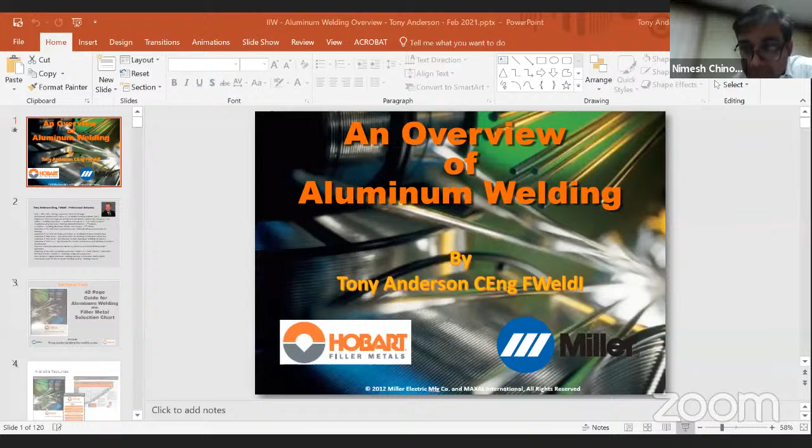Okay, thanks for all that, guys. This talk, we have a limited amount of time, so this is certainly an overview. We don't have time to get into real depth in most of this information we're going to be looking at right now, but my hope is that you will see the areas I consider most important related to the joining of aluminum and aluminum alloys, and give you an idea of areas within each that we could probably expand upon. I'll also include information on other materials where you can gain more on all these topics. So anyway, let's get into it.

Remember, this is an overview, and it's quite a lengthy presentation, so I'm going to be moving through it at a reasonable pace. As Chris said, that's me. I'm involved with a lot of AWS work, I've been on the AWS board as a director at large for the last 10 years actually, but I work with AWS a lot, and I work with ASME a little.

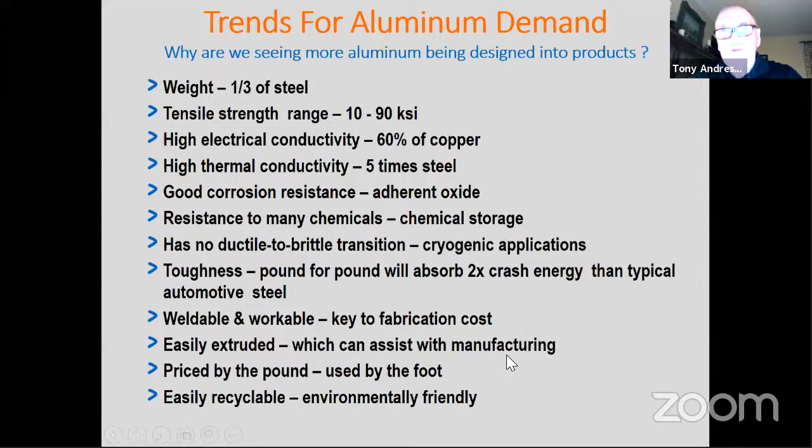Now, I had a chart that went back to 1940, and this curve wandered all the way down to nearly zero in 1940 - there was very little aluminum being used. Something happened in the early 1940s that made aluminum much more attractive for welding fabrication. Some of you probably know that was the introduction of the heliarc welding process, or TIG, gas tungsten arc welding as we know it now, developed in the early 1940s.

Shortly after that, of course, we got MIG, the gas metal arc welding process. But the inert welding processes were the big breakthrough in welding aluminum. Up until then, it was very difficult - you needed fluxes that were very corrosive, typically it was welded with oxyacetylene, and you could only weld certain alloys. It was very, very difficult. So yeah, absolutely, the introduction of inert gas welding processes in the 1940s was a massive breakthrough, and from then on we've just been seeing more and more aluminum.

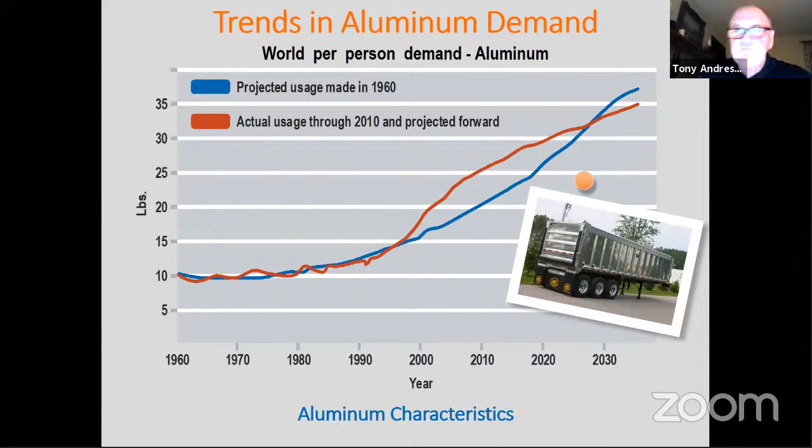I'll just go through a few pictures here that I chose of different applications, and just look at them quickly.

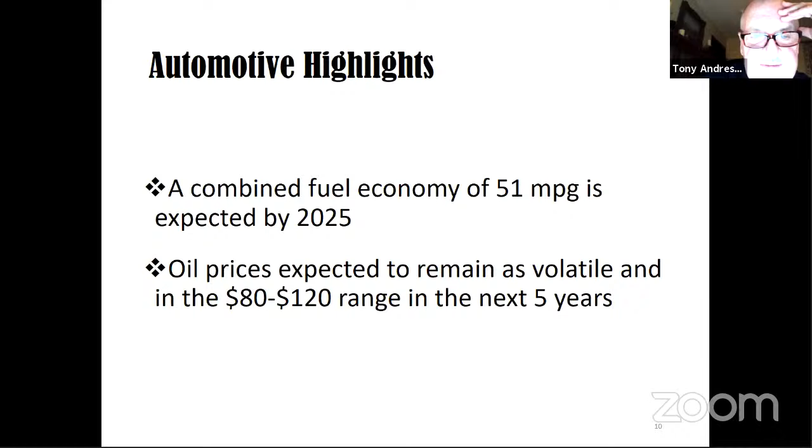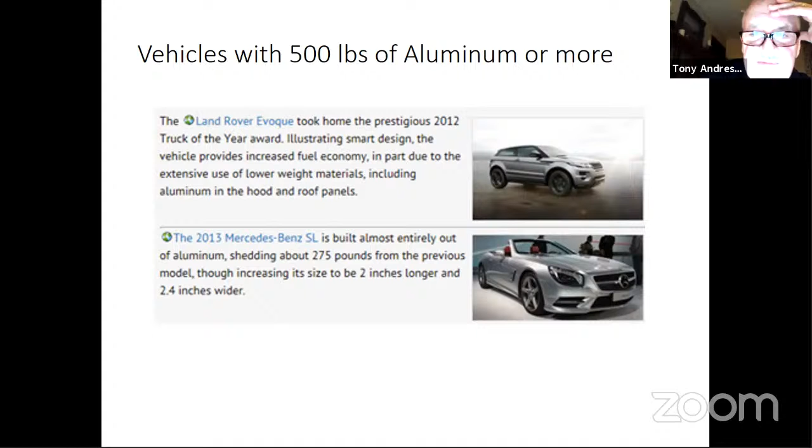Some of the vehicles you've all seen - the Land Rover, the Mercedes - these guys have been using aluminum for a long time. BMW and Audi were pioneers in space frame development when they started using aluminum in vehicles.

The big one over here a few years back was the Ford F-150, which is probably the best-selling vehicle in the world, but certainly in the States. It became an aluminum-intensive body, and it was a big deal at the time - the first high-volume aluminum-bodied vehicle to go into production in the world.

About 850,000 trucks per year and 350,000 tons of aluminum sheet per annum. So that was a big deal.

I'll tell you a quick story here. I have a good friend I've known for many years, a lady called Joanne, who works for Ford and heads up one of the research groups, PhD in laser welding. That was a specialty, I've worked with her on and off for years. She and her husband, who also works in the automotive industry developing aluminum fasteners, were working on the F-150 as a top secret project. They were sworn to secrecy, didn't want competitors to know they were putting all this aluminum into the vehicle. They came to find out that their daughter, who was very young at the time, told a teacher and her classmates that her mother and dad were working on an aluminum F-150. So yeah, these big secrets, right?

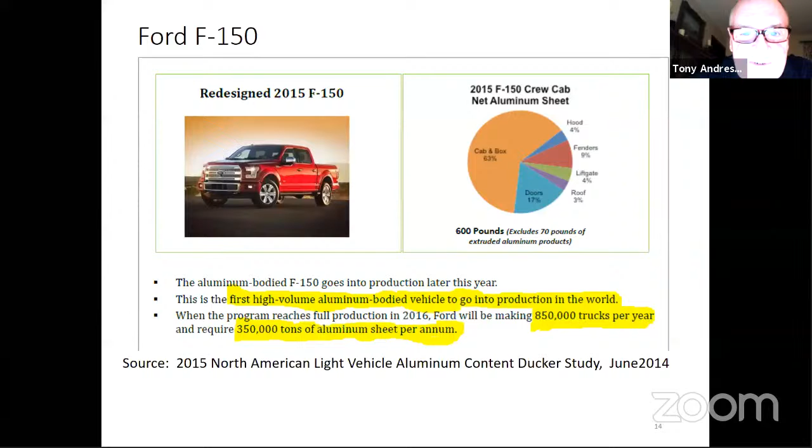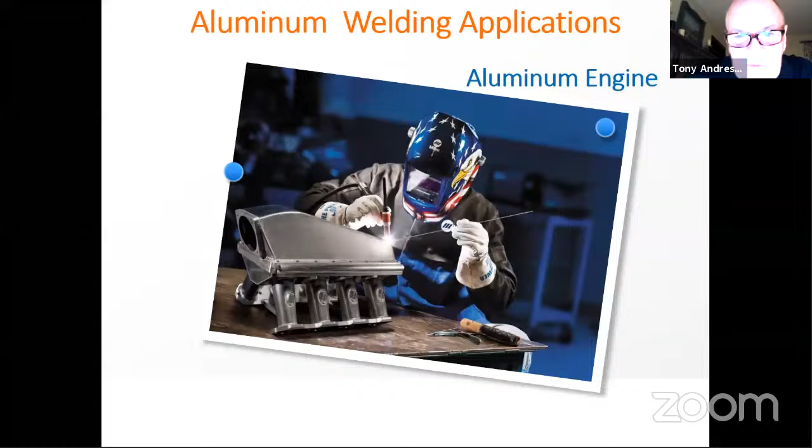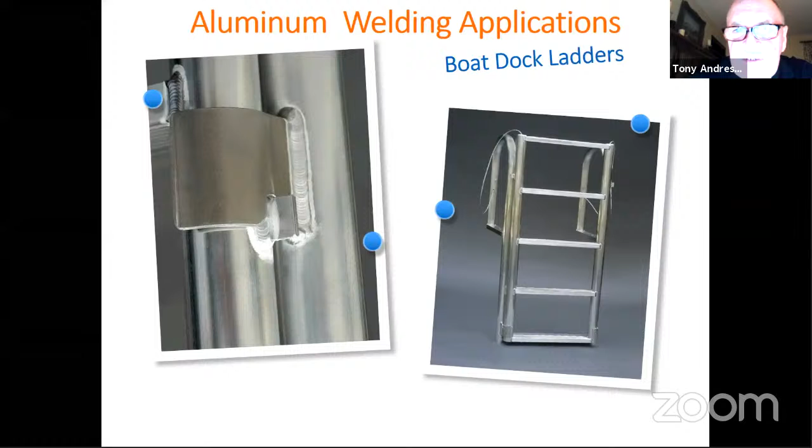Extrusions, these are all 6000 series, typically extruded tubing, welded with TIG. Closer view, you can see the arc etching at the side of the welds there. When you're welding aluminum with TIG, it's typically AC, and you get a cleaning action that strips the oxide during the welding process. You can see that at the side of the weld.

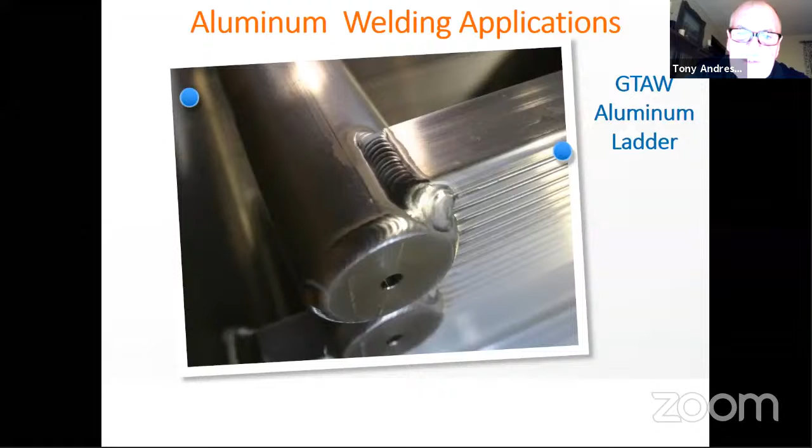So I've been specializing in aluminum now for over 25 years. I remember the shift, when I started, from sort of mundane components being welded, like radiators for trucks and things, to high performance components like drive shafts and components like this. All of a sudden you've got high integrity welds that need to perform in service, so the integrity becomes more and more critical, obviously.

This is a very common sight in the States now, aluminum truck trailers. Lightweighting again is becoming pretty much mandatory.

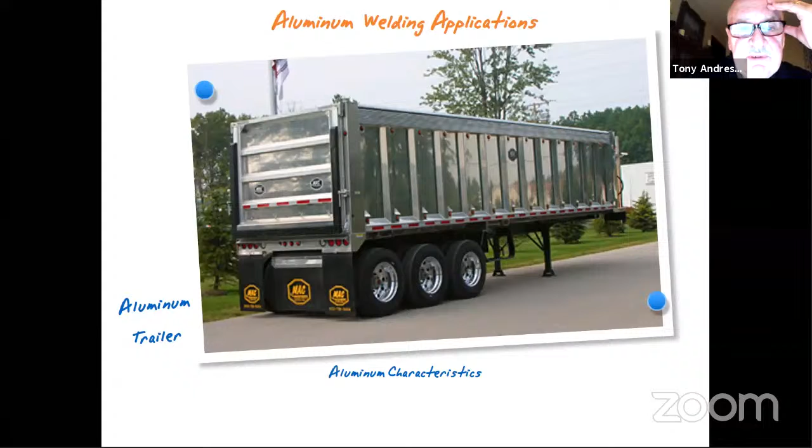This is an older application but still used extensively, heat exchangers, radiators, and all kinds of heat exchangers. Typically use the 3000 series aluminum manganese alloys, welded with the 4000 series filler alloys, so silicon alloys.

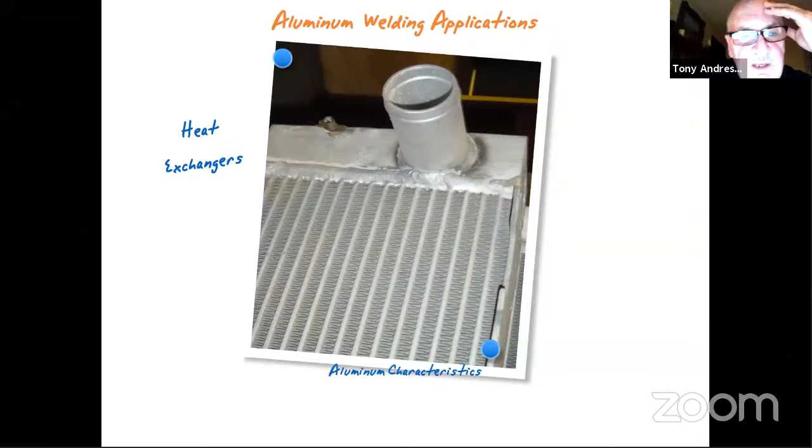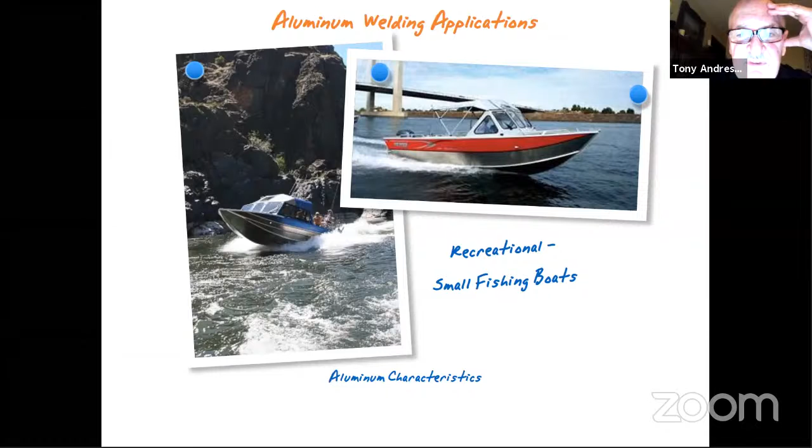Watercraft. These are smaller boats made of 5000 series, some 6000 series extrusions, but 5000 series plate. Sometimes low mag, 5052, which is about 2.5% magnesium, not terribly high strength, but suitable for lower strength applications like this. These are not high performance as such, a smaller craft. Might use 5086, which is a bit higher strength.

Let me get this. This is more of a high performance vessel, what we would refer to as a work boat. This is a Coast Guard vessel, as you can see, pretty much all aluminum, lightweight, travels extremely fast.

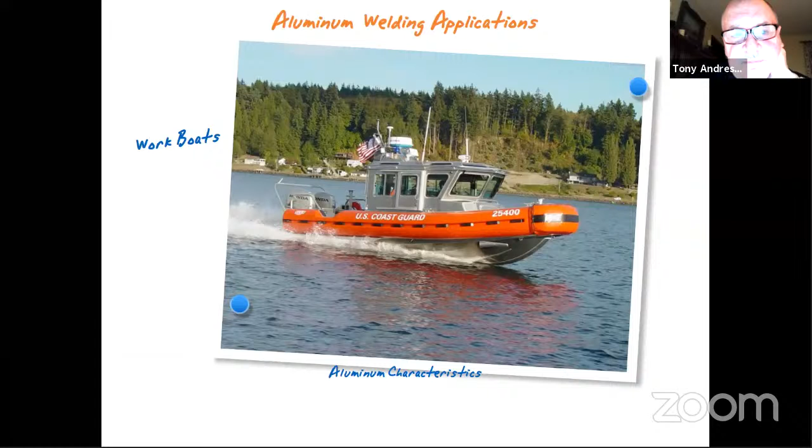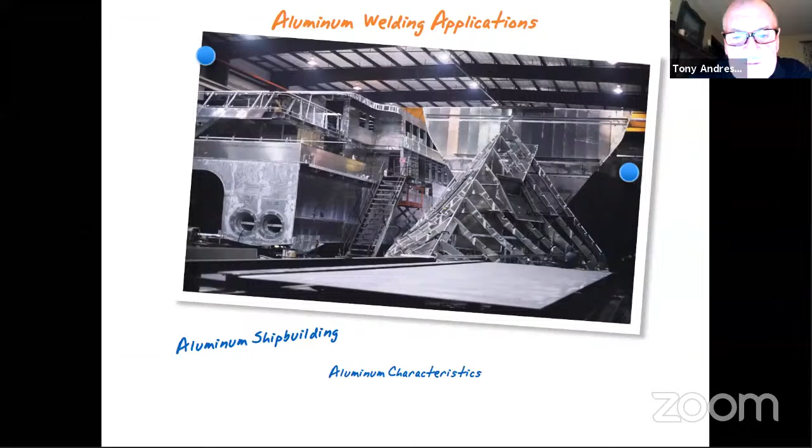Very large ships, military ships typically, but also commercial, car ferries and things like that. This is a vessel built by Incat in Tasmania. I actually went to visit these guys and had an opportunity to go on one of these in Tasmania at their shipyard. Very, very impressive, massive vessels.

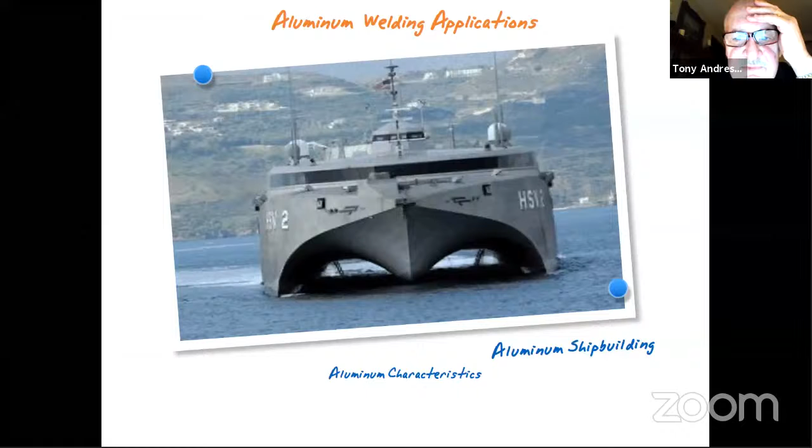There were 3 of them built for the US military a number of years back. That's the same vessel, traveling at incredible speeds because they're so light. And you notice they're not painted, this one is not painted. I asked the design engineer at Incat what that was all about, and he said, well, why add all that weight? He told me how much the paint weighs to paint a vessel like this. He said, what's the point, it's not going to rust, right? It's aluminum. So yeah, quite impressive.

And here we see a cryogenic application. These are very large aluminum spheres, 4 aluminum spheres on this vessel, 1, 2, 3, 4, made of aluminum up to, they tell me, about 8 inches thick in some sections. So they're very large vessels for the storage and transportation of liquid natural gas. Cryogenic application, aluminum works real well.

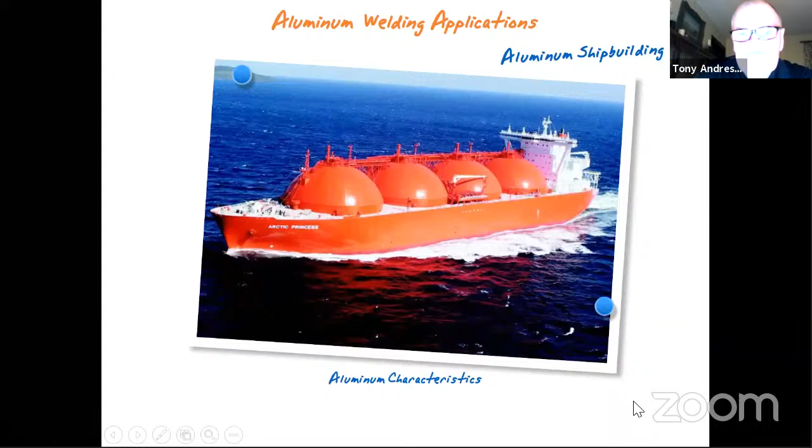Okay, let's look a little bit at the material itself. Again, remember, this is an overview. We haven't got the time to get into great depth, but it should give you a decent overview of the different types of materials.

First of all, we'll talk about the strengthening of aluminum. Pure aluminum has very low strength, about 10 KSI, so not terribly useful for structural applications. So one of the first things they did after coming up with a viable method of extracting the aluminum metal from the ore was to figure out how they could make it stronger. They knew it had great corrosion resistance, it was lightweight, but didn't have great strength.

So they found by adding alloying elements to the aluminum, we could increase its strength substantially. One of the first ones were the 2000 series, the copper alloys. Duralumin is a name some of you may have heard - one of the early aluminum copper alloys. Everybody used to say it was unweldable, and it was pretty close to being so because of the level of copper in the alloy they put in to strengthen it. They didn't realize how it was going to affect the crack sensitivity. But since then, they've come up with 2000 series copper-based alloys that are weldable and very, very strong, used in things like the aerospace and aircraft industry.

So alloying was the first idea, and it worked, and lots of different alloying elements can be added to aluminum to give it strength in different ways. The second method is, once we've added these alloying elements, some of these materials lend themselves to strain hardening extremely well. The 5000 series, the aluminum magnesium alloys, for instance, strain harden extremely efficiently. We'll talk a little bit about how that works.

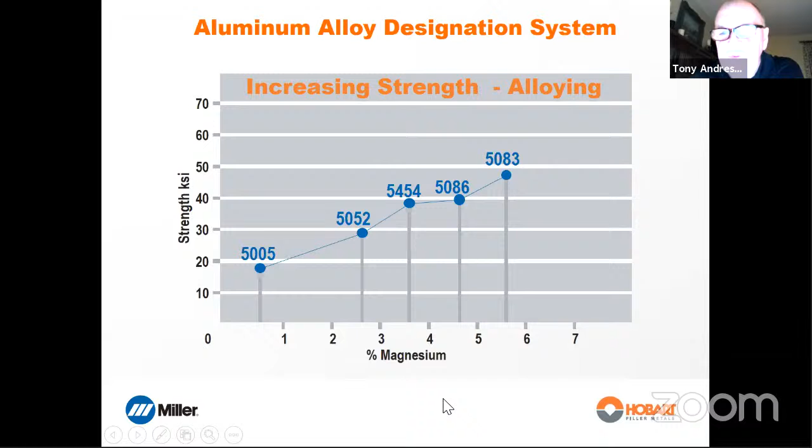This is a non-heat treatable alloy. It will not respond to heat treatment in terms of strengthening. If we heat it to a high temperature, we will anneal it, dropping it to its lowest strength. But other than that, we cannot increase its strength by thermal treatment, just strain hardening, okay?

So what is strain hardening? We take a 5000 series or any of the non-heat treatable alloys, or even the heat treatable alloys for that matter - we can strain harden them all. They all will respond to strain hardening.

This example is a 5052, which is 2.5% magnesium, and it's in an O temper. 5052-O means that's the annealed strength. The O means it's annealed. The annealed strength of any aluminum alloy is its lowest strength - sometimes people call it dead soft condition. In this case, we take a 1-inch plate of 5052 at its lowest strength, and its minimum tensile strength is guaranteed to be 28 KSI.

Now we put that plate, a 1-inch plate, through a set of rolls, and we reduce its cross-sectional area by 75%, taking it down to a 1/4 inch. We have now strain hardened that material to an H38 temper, and we've increased its strength from 28 KSI to 42 KSI.

We see its yield strength is also increased significantly, and its ductility is reduced as we would expect. Tensile strength has gone up, elongation has gone down.

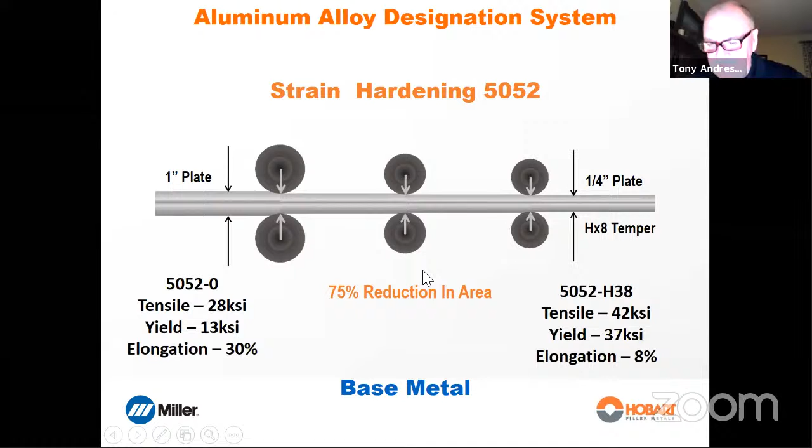So what actually happens when we weld this material in that strain hardened condition? The temperature of the weld in the heat affected zone is such that it will return the material to its annealed strength. It will no longer have that high strength. The rest of the material is unaffected, but the heat affected zone will return to the annealed condition. That is unavoidable, cannot be helped. The good thing is that it's predictable - we know exactly what it's going to be, so we can design around that strength.

And it isn't as dramatic in the non-heat treatable alloys. It's substantial, but not as bad as it could be in the heat treatable alloys. And we know exactly what it is, so we can make our design around that strength.

This is what actually happens. This is what the grain structure of the O temper, the annealed condition, looks like. This is as we start doing more and more strain hardening, cold working - same difference. This is taking it to an H14, which elongates the grain slightly, and this is taking it to an H18, the maximum strength, which elongates the material dramatically.

But when we weld it, we take this material here and we take it back to the anneal strength here, the O temper.

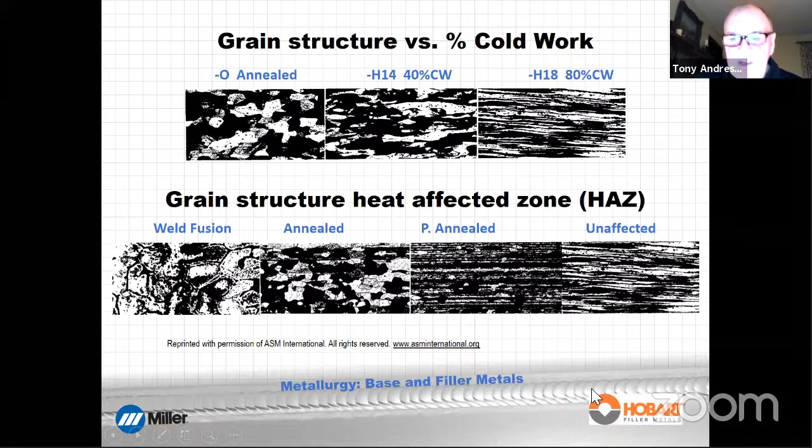So that's the non-heat treatable alloys we've just looked at. Now let's take a look at the heat treatable alloys - how their strength is increased through thermal treatment. A typical, one of the most common materials out there in terms of heat treatable alloys is 6061. It's used all the time, and this is why I chose it as an example. If we take a piece of 6061 in the O temper, the dead soft condition, its tensile strength is 18 KSI.

If we take that material and heat it up to 990 degrees and then quench it in water, we change its temper from O to T4. The T4 temper is solution heat treated only. We increase the strength by doing that from 18 KSI to 30 KSI. So we've heated the material to 990, quenched it in water, and increased the strength substantially.

What's that all about? Well, this material has small amounts of magnesium and silicon. When we heat this material to these temperatures, the magnesium and the silicon combine and form a compound called magnesium silicide, which is taken into solution at this temperature. When we quench it, we trap it in solution, which gives it strength.

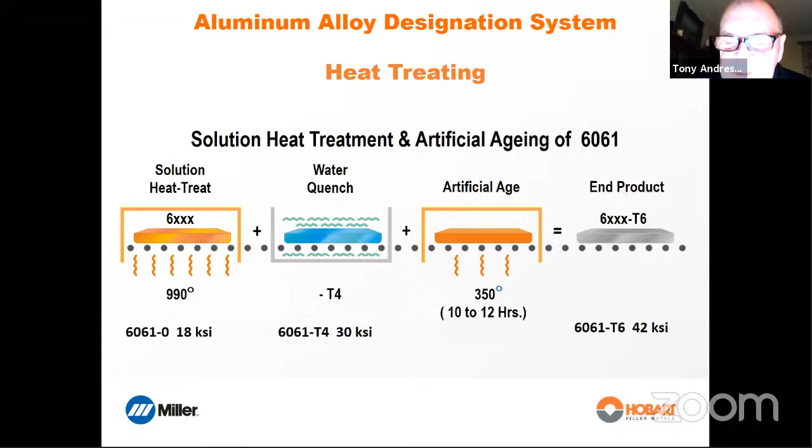So what happens when we weld it? What happens when we weld 6061 T6? Well, we really screw up the heat affected zone. This section here, the heat affected zone, we partially anneal it and overage it. We further precipitate the mag silicide, which weakens it, and we move it closer to its anneal strength.

Now, the amount we do that is dependent on the heat input during the welding process. So this is very different than the non-heat treatables. The non-heat treatable, it doesn't matter how hot you get them, you always anneal the heat affected zone. The heat treatables, absolutely, the higher the temperature in the heat affected zone during welding, the lower the strength in the transverse condition.

So when people fail welding procedure qualification tests with the 6000 series on their transverse tensile tests, the reason is just about always that they are overheating the base material during the welding process, right?

So the rule here is to keep the heat down as low as possible if you want to get the best strength out of the base material after it's been welded. So stringer passes, don't weave, fast stringer passes, low heat input, watch the interpass temperature and preheat.

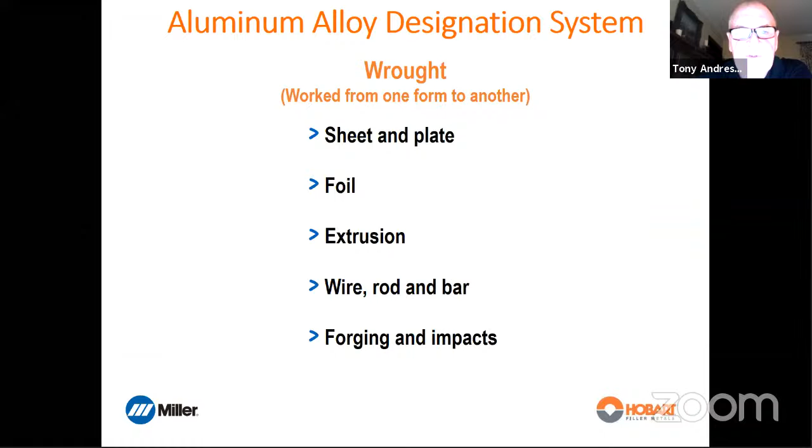All right, so I already mentioned there are two types of aluminum alloys. There's the heat treatable and the non-heat treatable. And I've already mentioned that we talk about the 2000, 1000, and so on. So the 2000, 6000, 7000 are heat treatable, and the 1, 3, and 5, and most of the 4000 are non-heat treatable. And I say most because there are a couple of 4000 that are heat treatable, because this is the silicon alloys, primary alloying element silicon, but some of them have little bits of copper or magnesium added, which turns them from a non-heat treatable to a heat treatable. That's another story.

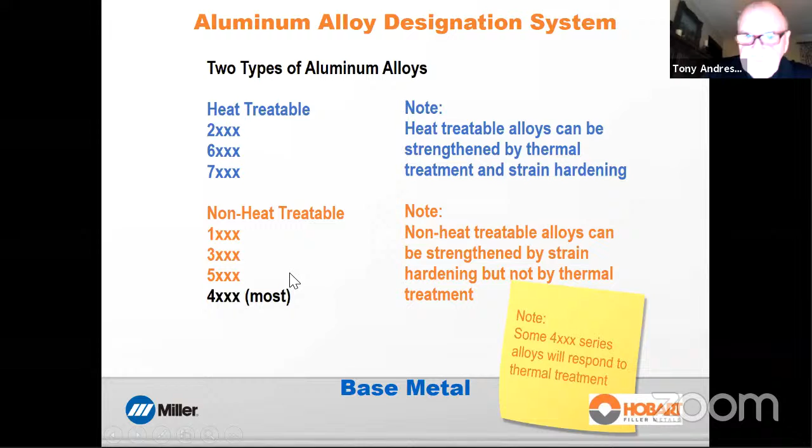The first digit in the alloy designation system indicates the principal alloying element of that aluminum alloy. Here they are.

The 1000 series is commercially pure aluminum, 99% minimum pure. What is it used for? Electrical conductivity and corrosion resistance.

2000 series, copper. What's its characteristic? Strength, high strength, heat treatable. Incidentally, all the blue ones are heat treatable and the orange ones are non-heat treatable.

3000 series, manganese. Thermal conductivity is really good, the highest after the 1000 series, and it's used for things like pots and pans. The old aluminum pots and pans were all made of 3000 series. Radiators and heat exchangers, because of its good thermal conductivity and relatively moderate strength, also use the 3000 series.

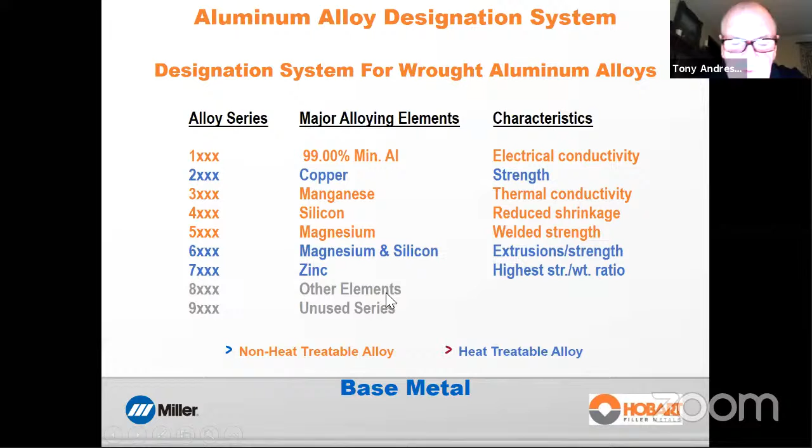7000 series, high strength to weight ratio, used in aerospace or high performance sporting equipment. These are the zinc alloys, 7000 series aluminum with zinc. You can ignore the 8 and 9 series, I don't even know why they're there.

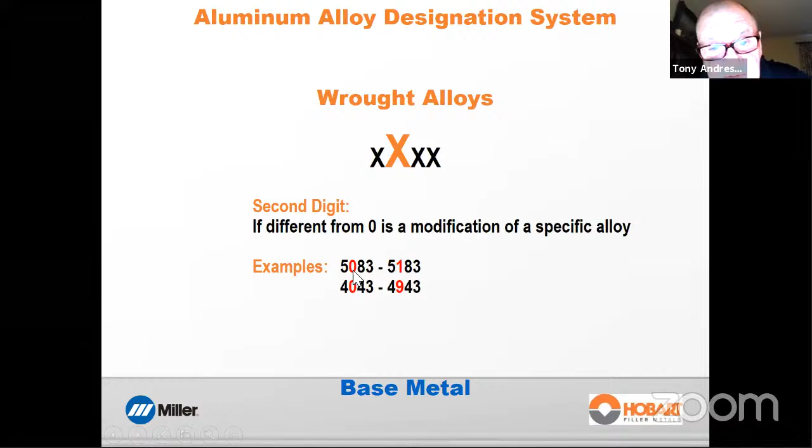Second digit indicates a modification to a specific alloy, unless it's a 0. If it's a 0, like 5083, that's the original alloy when it was registered. 5183 was a modification to alloy 5083. Same with 4043, the original alloy registered for 4043; 4943 is a modification to 4043. So the second digit indicates a modification unless it's 0, then it's the original alloy.

The last 2 digits in the 4-digit numbering system don't mean anything. They're just an arbitrary number assigned by the Aluminum Association to track the alloy in the register. However, there's one exception, and that's the 1000 series alloys. In the 1000 series, the last 2 digits indicate the purity of the alloy above 99%.

For example, 1100 is 99.00% pure. 1188 is 99.88% pure. 1050 is 99.50% pure. So that's the only time those last 2 digits mean anything.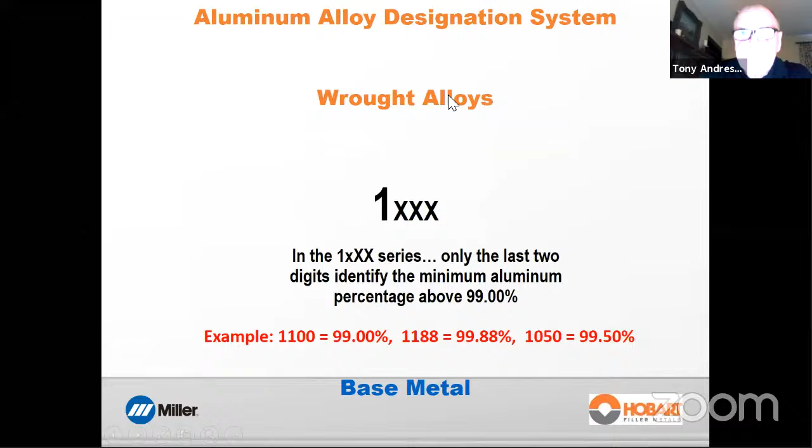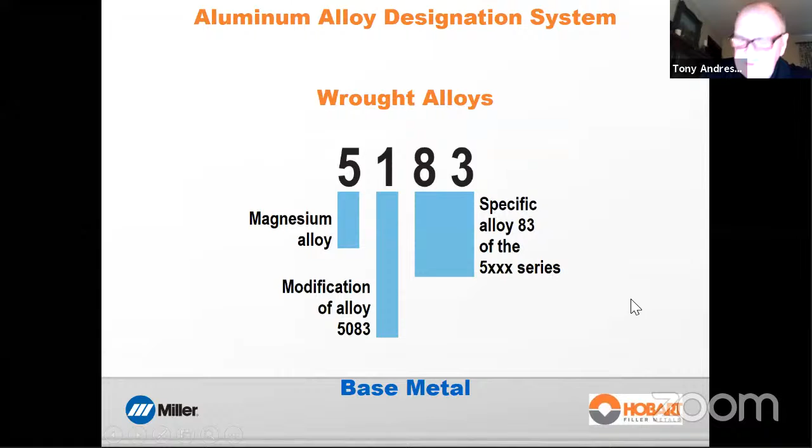All right, filler metal selection. First off, I just want to tell you quickly, breaking news here. You may or may not have heard of a document called AWS A5.10. It is the AWS specification for the classification of aluminum filler alloys.

We have just written this - I'm the chair of this committee - and it's just been published. They tell me by the end of this month it will be for sale, the 2021 edition. It's big news because for the first time ever it includes the minimum tensile strength of filler material for aluminum filler alloys. It's always been based on chemistry only; now it's chemistry and minimum tensile. We've added a couple of tables that require tensile testing and provide the minimum strength requirements, and there they are.

We have 4043 coming in at 24 KSI. This is the minimum guaranteed strength, not the typical, which is a bit higher. But the interesting thing is 4943, the new 4000 series alloy, which comes in at 30 KSI, substantially higher. Again, this is the minimum, not the typical. All these figures have been around for a long time, except 4943, which we just got together by testing.

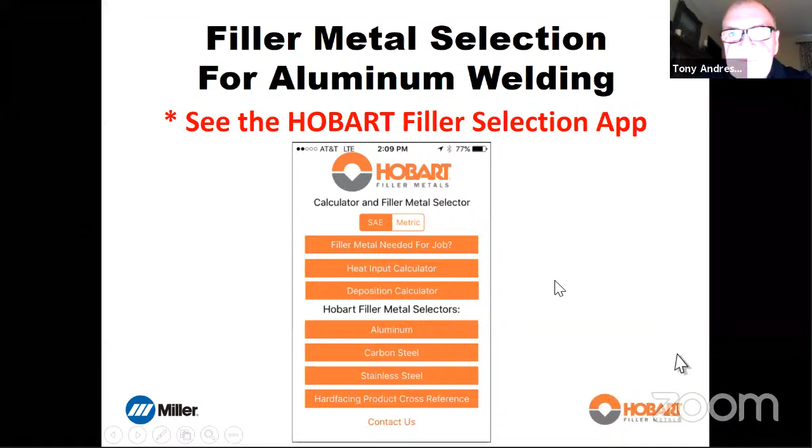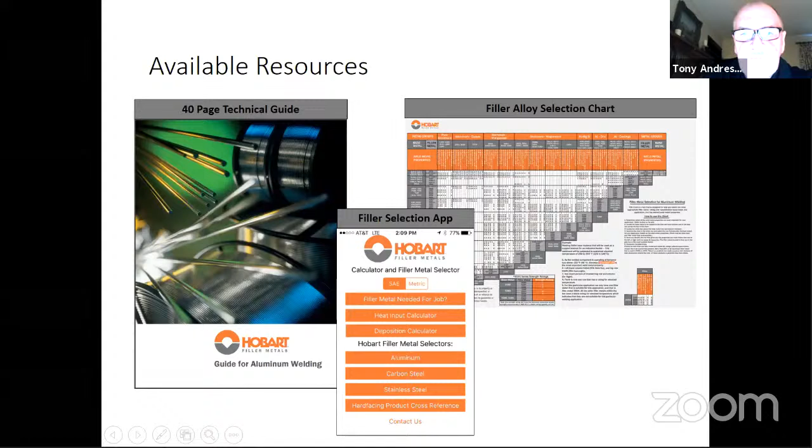This is what the chart looks like. It has all the base alloys here and here, and all the filler alloys down here and across here. Let's go through and explain how this works.

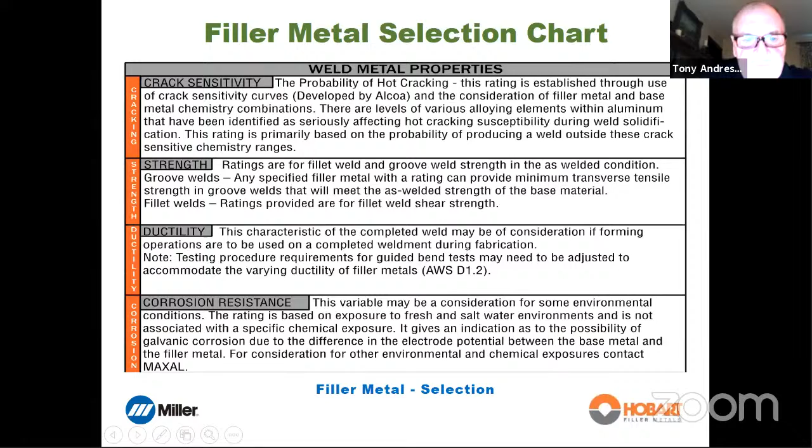I said earlier that the selection of filler alloy for aluminum is different than for steel. To give you an idea, here are the considerations. Crack sensitivity is really important; certain alloys are very crack sensitive, and if you don't use the right filler alloy, they will crack. Strength of filler alloys differs significantly in some instances; you might be able to use a filler for that base material, but the strength could be quite different, and if you choose the wrong one, you might not pass the transverse tensile test. Ductility varies a lot too; the 4000 series typically lack ductility compared to the 5000 series. Corrosion resistance also differs between filler alloys, and we have ratings for them. Elevated temperature service is critical; only certain filler alloys can be used above 150 degrees Fahrenheit, and choosing the wrong one leads to stress corrosion cracking problems.

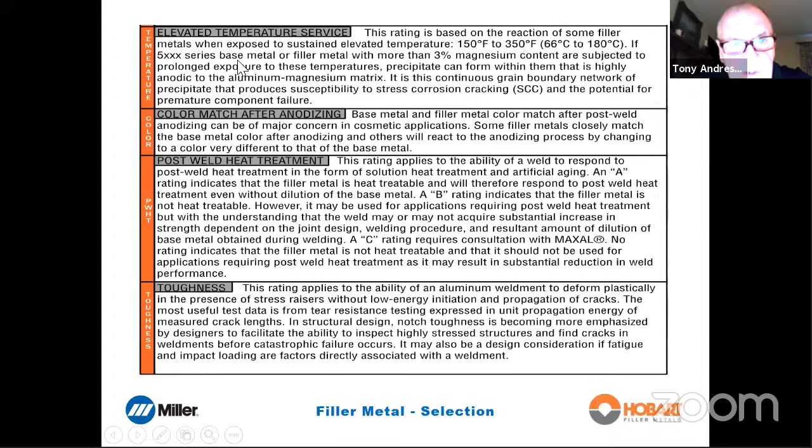Color match after anodizing is a big deal. If you anodize a cosmetic component and use the wrong filler alloy, all the welds will go black. Post-weld heat treatment matters too; some filler alloys respond favorably to it, others will not, and it would be a bad idea to use certain filler alloys and then post-weld heat treat them. Toughness also differs between filler alloys. All of these ratings are covered in the filler alloy selection chart.

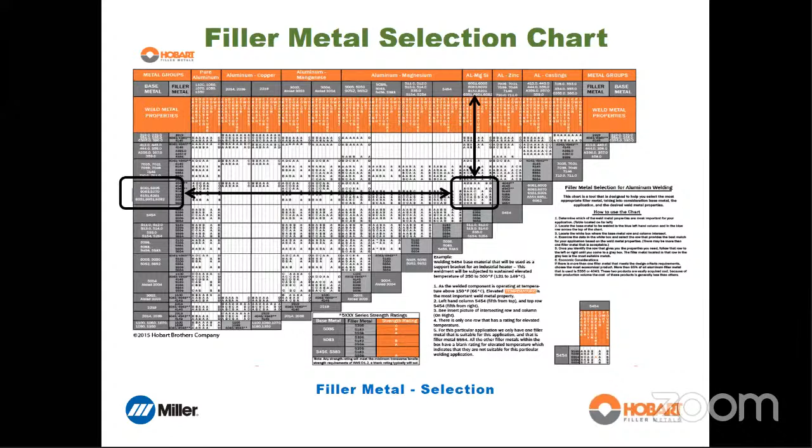Hope I'm not running out of time. Does somebody want to tell me whether I need to speed up or am I running out of time? I could go for another 10 or 15 minutes if it works for you guys. It's going good, Tony, we're good for 15 minutes, you can take 20 if you want. People are really engrossed, so take your time. All right, then I'll carry on.

Here's how you use the chart. We've got the base alloys; in this case 6061 welded to 6061. We go to this circle, which gives us all the filler alloys you can use for welding 6061. There are 7 filler alloys listed that you can choose from. Any of them can weld 6061, but depending on your application, you may choose one over the other. For instance, if you're going to anodize, you would not choose 4043 because the weld would go black. You would use 5356 instead.

Here's an example, and it's a temperature example, which is a good one. We've got some 5454 base material, and I know this is a 3% mag maximum base alloy, which is typically designed to be used at elevated temperature. It's going to be used as a support bracket in an industrial heater, and it's going to be subjected to 250 degrees Fahrenheit for prolonged periods.

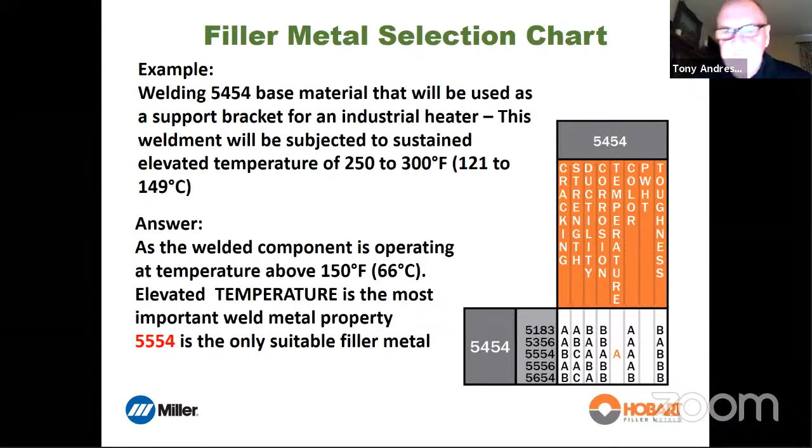Hope I got that one across. All right, and this is a list, something we publish in our book, and it's kind of like, I don't know, what would you call it? Just a do and don't list, good practice.

So for base material, it says less than 3% mag, you can use 4,000 or 5,000. For good anodizing color match for 6,000, use the 5,000. For higher ductility and toughness, 5,000 over 4,000. For elevated temperature, you can use 4,000 or 5554, which was designed for that. So it goes on and on. This is all based on what you would find if you were to look on the filler alloy selection chart.

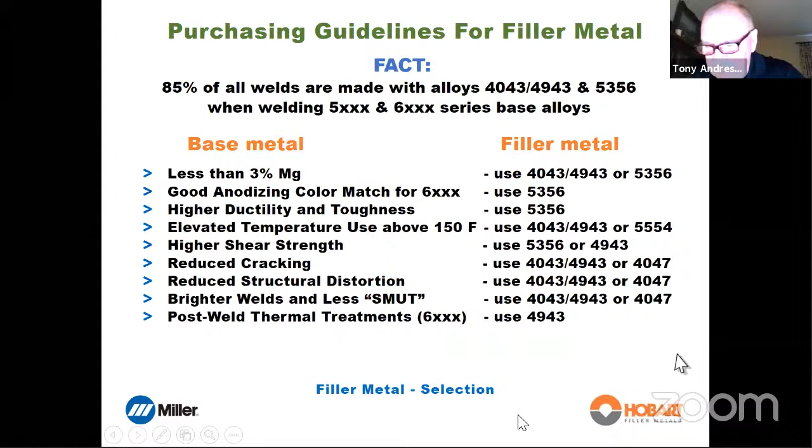A little bit about weld discontinuities. I said I chose two. Most of the weld discontinuities are the same in aluminum as they are for other materials, but two of them stand out to me because they are different in some respects. So I chose porosity and cracking, and let's take a look at those.

First of all, what is a discontinuity? I always have this slide at the beginning of this section, because a lot of people talk about defects like every discontinuity is a defect. Well, they're not. Every defect is a discontinuity, but every discontinuity is certainly not a defect. It has to be outside an acceptance criteria. So my advice to people is to tend to refer to porosity and cracking and undercut and all these things as discontinuities rather than defects, because they may or may not be defects, since you may or may not know what the acceptance criteria is. So it's advisable, particularly if you're writing a report. Just my advice, that's all.

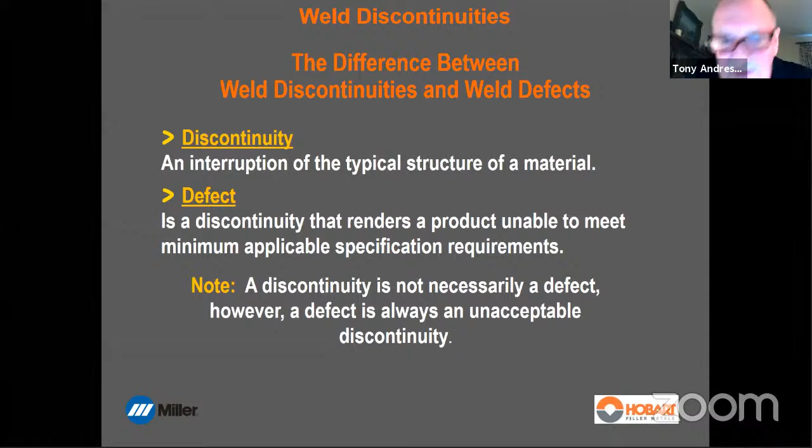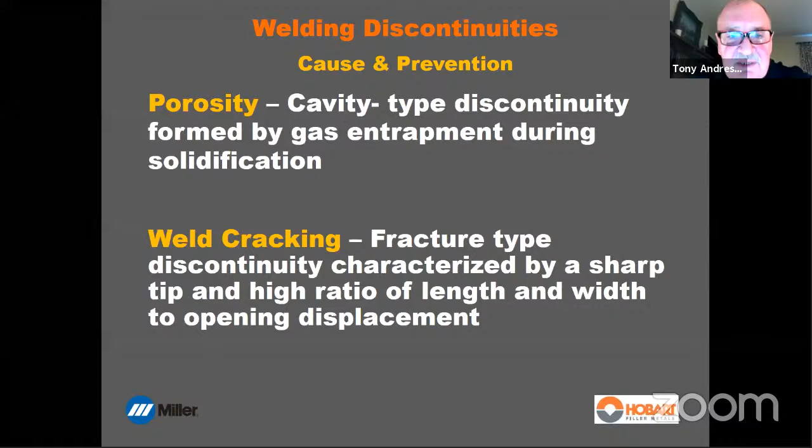All right, so we're going to talk about weld cracking and porosity. Porosity is a cavity type discontinuity, we all know what porosity is, right? It's caused by gas entrapment during solidification. And cracking is a fracture type discontinuity, and that's the definition, the AWS definition, the height to depth ratio and so on. So we all know what a weld crack is. Moving on from there.

Porosity, again, cavity type discontinuity, and it's formed by hydrogen gas. This is really important, and it's entrapped during solidification. It's all about hydrogen in aluminum.

Aluminum has a high affinity for hydrogen when it's in its molten condition. So if someone calls me and says, I've got a porosity problem, I say, okay, there's no quick fix for this, but you need to understand, in order to find out where it's coming from, that you have a source of hydrogen near your weld. Now it's up to you to find out where that hydrogen is coming from. So it can come from, I've listed three areas here of concern, and these are the typical three areas that you need to look at.

Hydrocarbons is the first one. That's any form of contamination, usually on the surface of the plate, but can be on the surface of the wire, like oil, grease, paint, or any type of contaminant that might be on the surface that may have hydrocarbons in it can cause porosity.

The next one is hydrated aluminum oxide. Aluminum oxide is a strange beast, it does a number of things, and one of them is that it can absorb moisture and become hydrated. If you weld over a hydrated aluminum oxide, it will release that hydrogen during welding, and that will cause porosity. So you have to remove any hydrated aluminum oxide from the surface of the plate, and make sure that your wire is not contaminated by moisture.

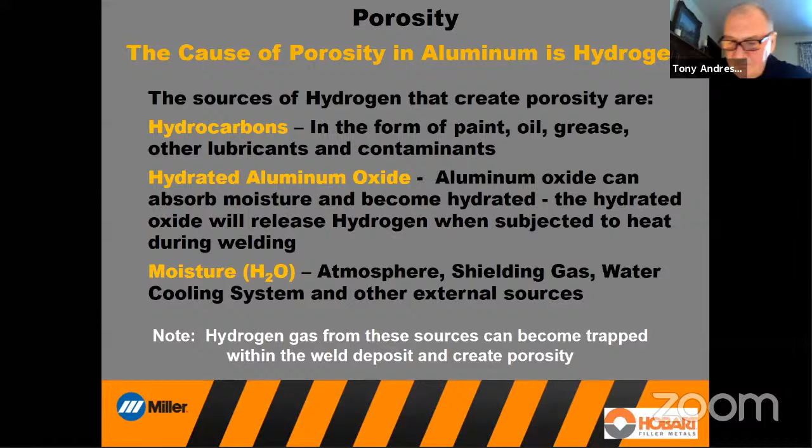This is a classic solubility of hydrogen in aluminum chart. As you can see, at room temperature it doesn't want anything to do with hydrogen, but as we get to its melting point, 1220, its capacity to absorb hydrogen goes up tremendously and keeps increasing as the temperature gets higher.

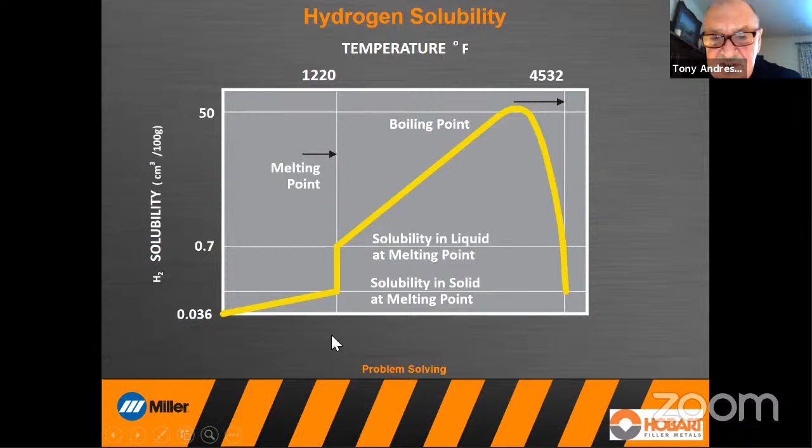So we're operating at temperatures around here somewhere, aren't we? 3,000 degrees, I don't know, doesn't really matter. When we melt aluminum, it wants to suck in hydrogen. If there's any around the weld in various forms, it's going to take it on board.

Then as the weld solidifies, it can't get out quick enough and it causes those bubbles right in the weld. And this is what they look like. If you don't have X-ray capabilities and you want to check a groove weld, you can do a nick break test. You can cut a slice of the weld, nick it, break it, and look at the inside of it.

These little tiny dots are micro porosity, which is very difficult to get rid of, but usually very acceptable in codes and standards because you don't count porosity over a certain size. So this tiny micro porosity is usually acceptable, but these big hunking porosity here is not. Each one of those would need to be counted, and I'll tell you now that this would probably fail certainly A5.10 requirements and probably D1 too.

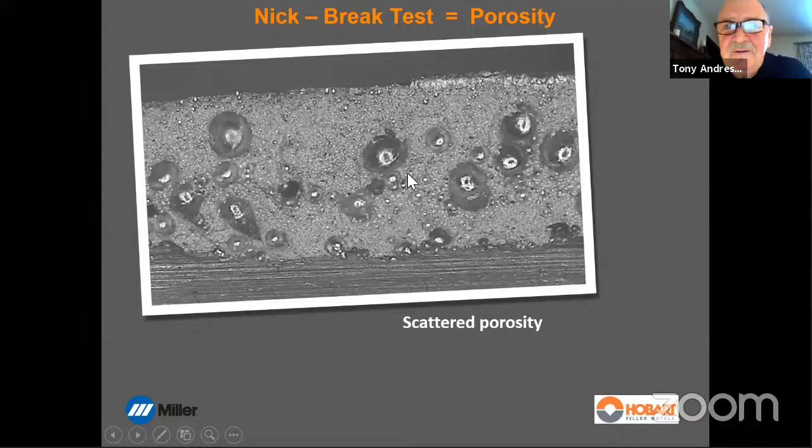Here we see porosity in a cross section of a fillet weld. Again, it's guaranteed this porosity is formed by hydrogen. Where the hydrogen comes from is what you have to find out and eliminate.

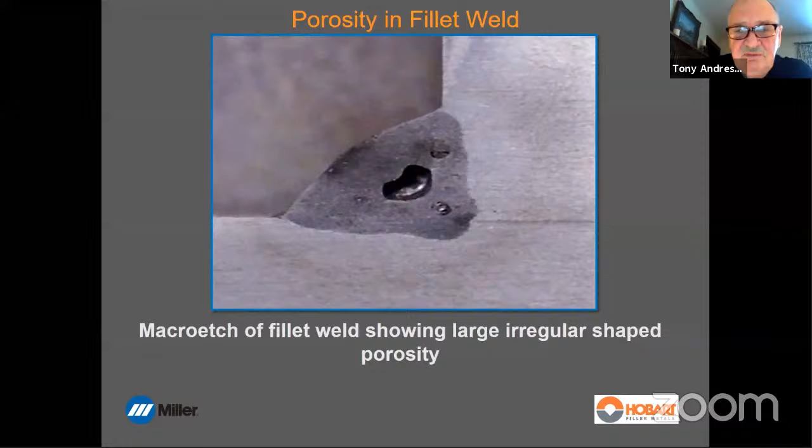This is an interesting slide, and it's a bit misleading, but it's interesting. Is porosity a really nasty discontinuity? Well, in my opinion, not really. It's a pain in the ass, and it's difficult to get rid of at times. But does it reduce the strength of the weld tremendously? No, nowhere near as much as a crack or incomplete fusion.

This is telling us that if we weld 6061 with 5356, we can actually remove nearly 30-some percent of the weld, about a third, before dropping below the design strength of the weldment. That sounds bizarre, right? A third of the weld missing and it still meets minimum tensile? Well, if you look at the strength of the base material and filler alloy, minimum tensile 24, and then you've got 5356 which has about 40 KSI, you can remove a lot of filler alloy before you drop to that strength. So it's a bit misleading.

Moving on to potential sources of contamination: welding in drafty conditions blows away your shielding gas and contaminates the weld. Excessive spatter buildup inside the nozzle restricts gas flow. Incorrect standoff distance starves the weld of shielding, allowing atmospheric contamination. You need to establish and maintain correct shielding gas flow rate.

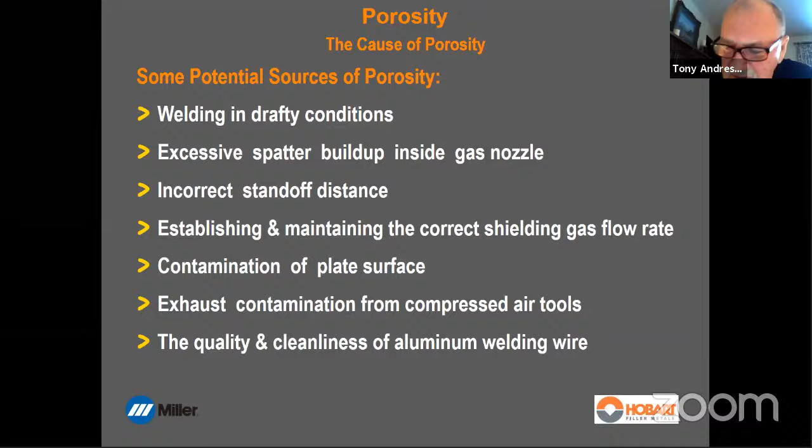Anti-spatter compounds — be careful, not recommended for aluminum. Water leaks, obviously a problem. Inadequately pure shielding gas is not typically an issue, but it can happen. Imperfections in the gas delivery line happen all the time, and bulk gas systems with leaks can be a major headache. Condensation on plate surfaces, absolutely. Hydrated aluminum oxide, absolutely. Cutting fluids and saw blade lubricants, yeah.

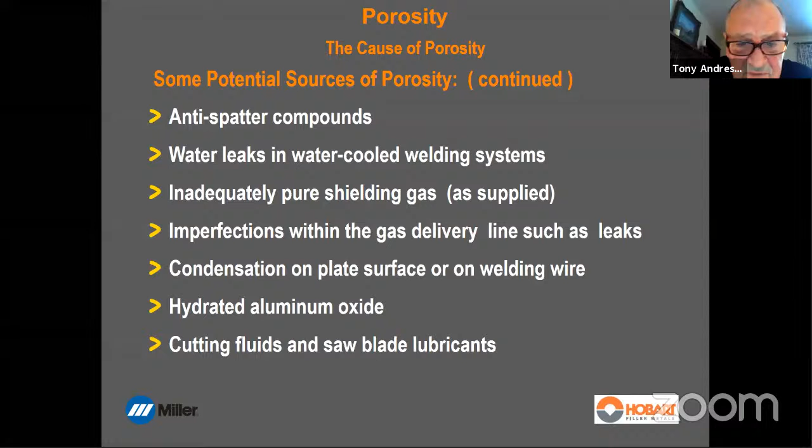You can cut aluminum dry — you don't have to use cutting fluids and lubricants. So whenever you get a chance, cut it dry. But if you do use them, make sure you remove them, and that's not always easy.

Regarding dew points, if you're working in humid environments, and you guys certainly do over there, you've got to be careful about fluctuations in temperature. Small changes in temperature can cause moisture. If we're looking at relative humidity in the 80s and 90s, very small changes in temperature between the atmosphere and the metal are necessary to get condensate. You'll get moisture appearing, even if you don't see it, on the surface of your wire and your plate. So be aware.

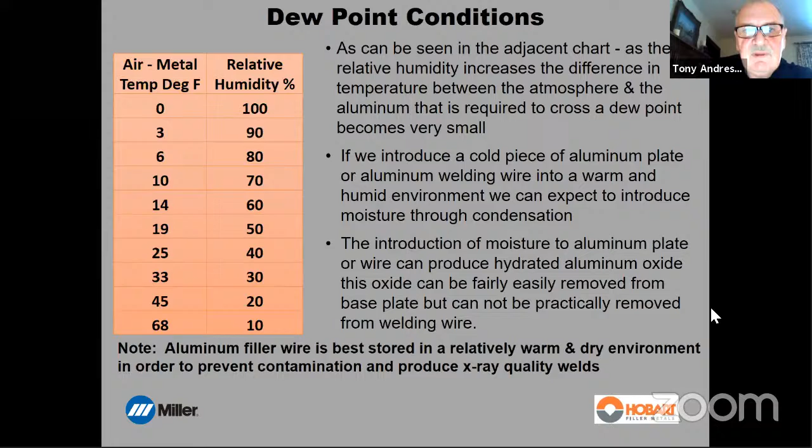All right, we'll go through all these. Moisture removal, degreasing, wire brushing — that's pre-cleaning. If you want X-ray quality welds, not just high quality welds, you really need to take pre-cleaning seriously. The best people out there turning out the best aluminum welds pay much attention to pre-cleaning methods and storage, usually in the order of moisture removal, degreasing, and wire brushing.

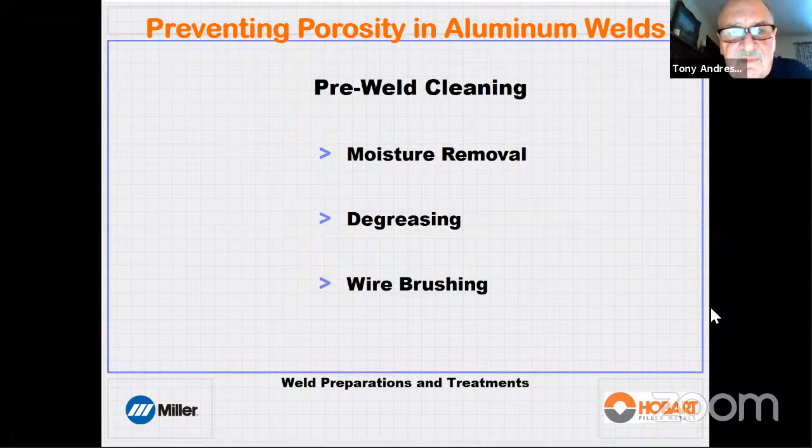Correct storage of base metals, appropriate removal of oxides. The amount of cleaning is determined by the end product, obviously. If you're building a bicycle rack or something not safety critical, you don't have to worry about cleaning the hell out of it. But if you're building something safety critical, like a heat exchanger, LNG tanker, or ballistic armor plating, you really need to be paying attention to this.

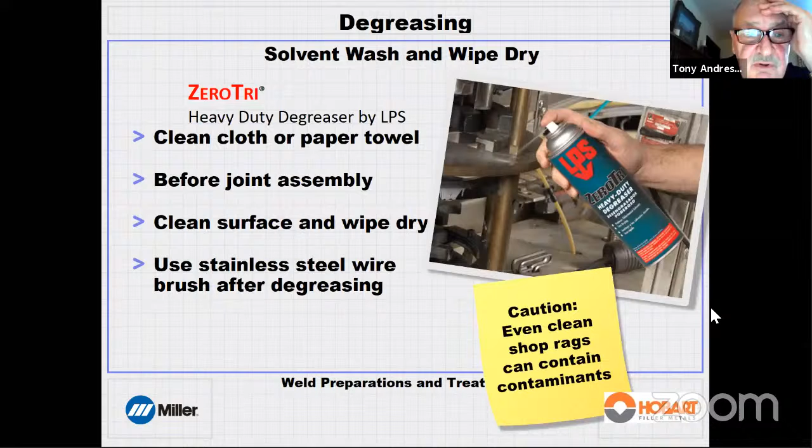This is a good solvent we use here in the States, made by a company called LPS, called ZeroTri. You can spray it on the surface of the material, or on a paper towel as we normally do, and wipe down the surface to get rid of hydrocarbons. That's the first thing you do before you wire brush — you always degrease before you wire brush. Otherwise you can take contaminants on the surface and push them into the subsurface if you haven't removed them, and also contaminate your wire brush.

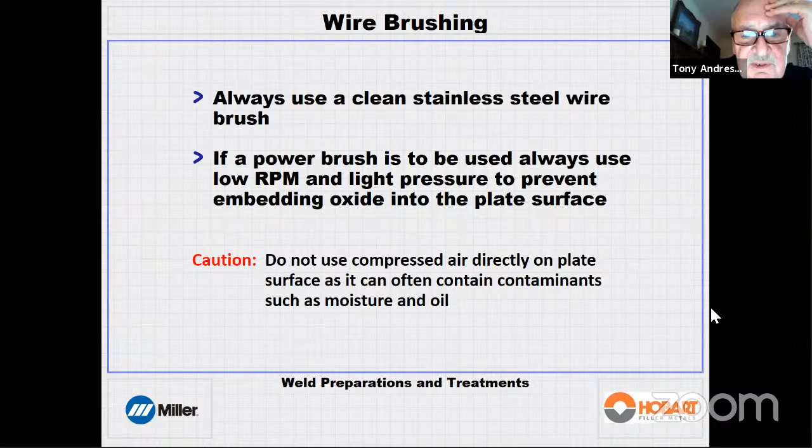If you're going to power brush, be careful, don't overdo it. Use light pressure, low revs per minute, because you can actually churn that oxide and embed it into the surface of the material. So be careful. Also be careful with compressed air, because it can cause a lot of contamination — it's not usually very clean.

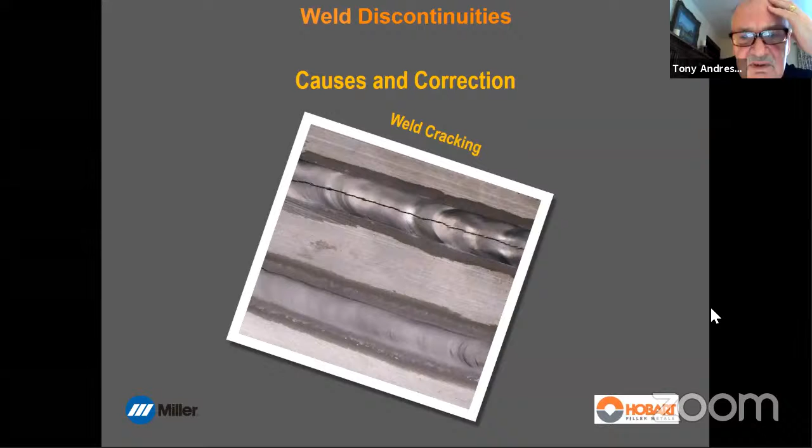All right, cracking — let's go back one. All cracking in aluminum is hot cracking, and we see it under a lot of different names. Weld bead cracking is often called solidification cracking. Thermal cut edge cracking, which I'll talk about, is also solidification cracking. Fusion zone cracking is often referred to as liquation cracking, and there's precipitation cracking, and we get stress cracking. If we subject the weld to more stress than it can actually stand during solidification, it's going to pull apart, and that happens quite a lot in aluminum. People don't understand it because you've got a lot of shrinkage, which gives a lot of stress.

So let's move on a little bit.

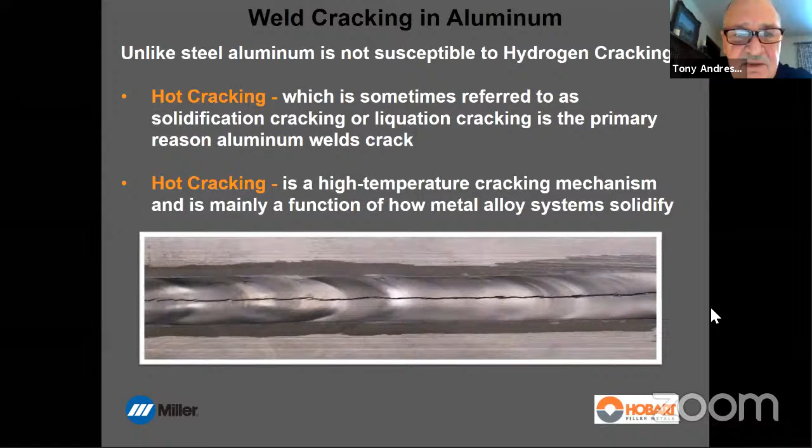It's a high temperature cracking mechanism, and it's mainly a function of how metal systems solidify. So I say this all the time, it's all about the chemistry. That's why you really need to know the chemistry of the base alloy you're welding before you even attempt to put a welding procedure together. Otherwise it's the blind leading the blind. You've got to know the chemistry because it can seriously affect the crack sensitivity.

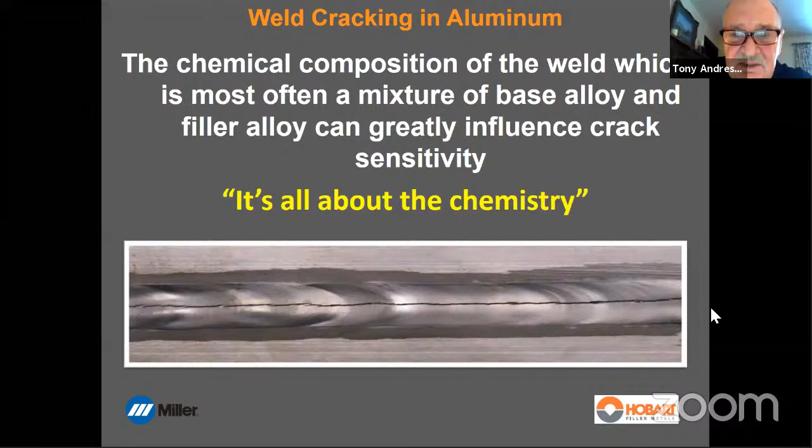I stole this from someone Chris knows very well, Gene Mathers. I know him, I like to call him a friend. Known him for a lot of years, he's retired. He's a TWI guy, and he wrote a book, Welding of Aluminum and its Alloys. I stole this from him because I think he does a good job explaining hot cracking, and I'm going to read it.

Hot cracking is a welding problem that does not occur in pure metals. The addition of alloying elements to a pure metal can result in a number of different phases being formed during solidification. One particular phase is the lowest melting point composition of an alloy, known as its eutectic composition, which freezes at one specific temperature. It is this eutectic phase that can promote hot cracking. In most metals, this effect is caused by impurities. Sulfur in steel and nickel is a good example, where low melting point sulfide eutectics are formed. In aluminum, it is the deliberately added alloying elements that form a range of eutectics with freezing points substantially lower than the bulk metal. I think he did an excellent job describing what's going on here.

All aluminum alloys have a certain susceptibility to hot cracking because they're all alloyed, apart from pure aluminum, but any of the alloys are susceptible, just varying degrees of susceptibility. So it's all about how the material goes from liquid to solid and what is left in these grain boundaries at the end of solidification. If we have these eutectics along the grain boundaries, these low melting point components, then they tend to rip apart during solidification from the shrinkage stresses, and that's when we get hot cracking.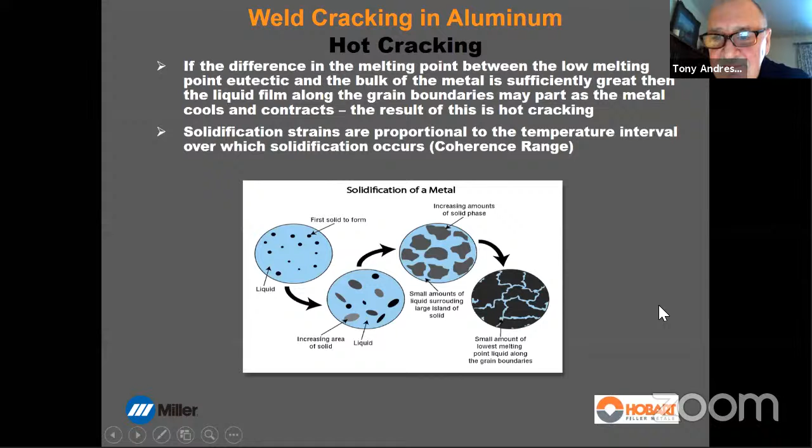This hot cracking phenomena has a standard flow. It starts off very low as we add alloying elements. Very low amounts of any alloying element usually have very low crack sensitivity. Then as we add more and more alloying elements, it increases and increases and reaches a peak of crack sensitivity at a certain amount of alloying element. Then as we add more alloying element, it gets lower and lower, okay? So the secret here is to prevent being around the peak of crack sensitivity in terms of alloying element addition. We need to either be on the left or on the right-hand side of the crack sensitivity curve.

These crack sensitivity curves were developed by Alcoa many years ago when they first started welding aluminum, and they were a well-kept secret, in my opinion, until recently. I actually put them into Welding Aluminum Theory and Practice. They weren't in there, believe it or not. But anyway.

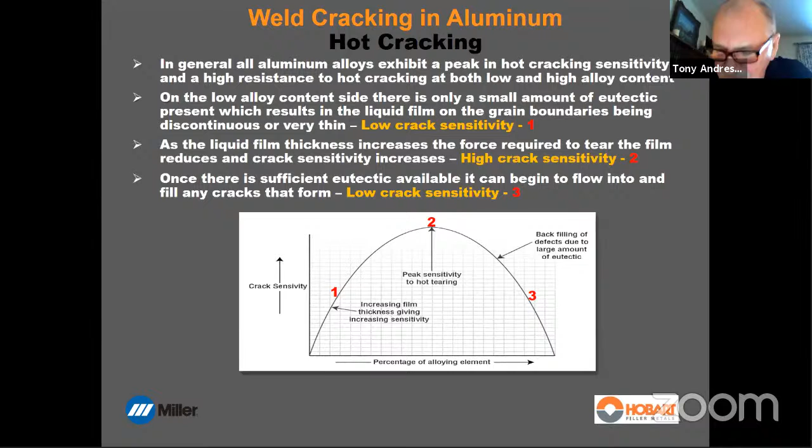So all aluminum alloys, as I said, are susceptible to some degree. It differs only by the degree. Cracking testing has been used to determine the crack sensitivity, so we're going to look at the crack sensitivity curves, and here they are. You'll find these published in a number of documents now, but they were very well hidden for many years for some reason.

So what we're looking at is 4 individual crack sensitivity curves here. We've got silicon in aluminum, copper in aluminum, magnesium in aluminum, and magnesium silicide, Mg2Si in aluminum. We see the amount of those elements and how it affects the crack sensitivity. If we look at the top one here, aluminum and silicon, we can see that at 0.8%, just below 1%, is the peak crack sensitivity of silicon in aluminum. So if you've got a piece of aluminum with 0.8% silicon and you try welding it, chances are it's going to crack.

Now, with copper, it ranges all the way from just above 1 over to about here, peaking around here. So anywhere between 1.5 to 3.5, you could run into crack sensitivity problems. So the copper alloys tend to have a wide range of crack sensitivity, and for that reason, sometimes somewhat difficult to weld. Aluminum magnesium peaks at around 1, just above 1%. Mag silicide, again, just around 1, just over 1%.

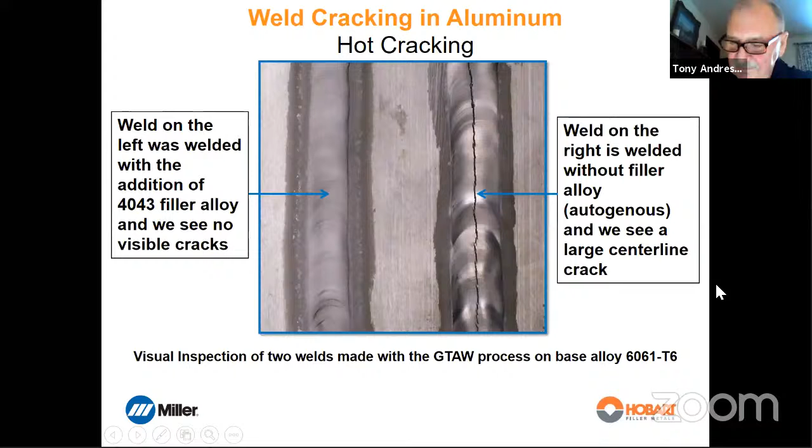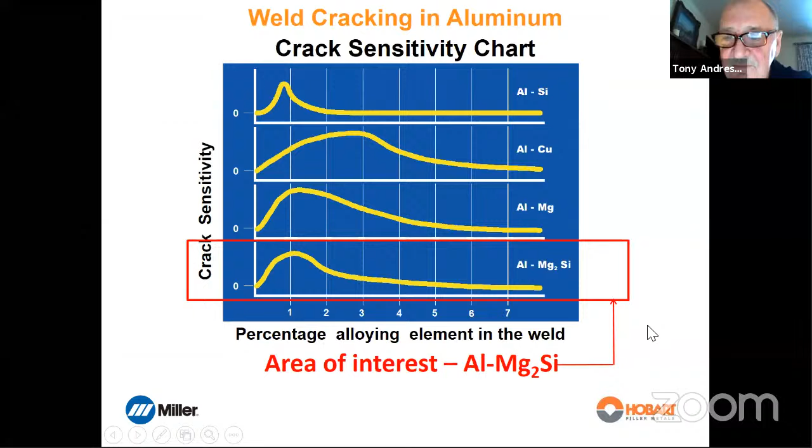That's the crack sensitivity curve. This is the reason there is no 6000 series filler alloys. If we had a 6061 filler alloy, every time we used it, it would crack.

So why does it not crack when we had the 4043? Well, as I said, we changed the chemistry, and we also have high silicon, which I told you earlier, reduces the shrinkage during the freezing. So 4000 series is very good to prevent cracking.

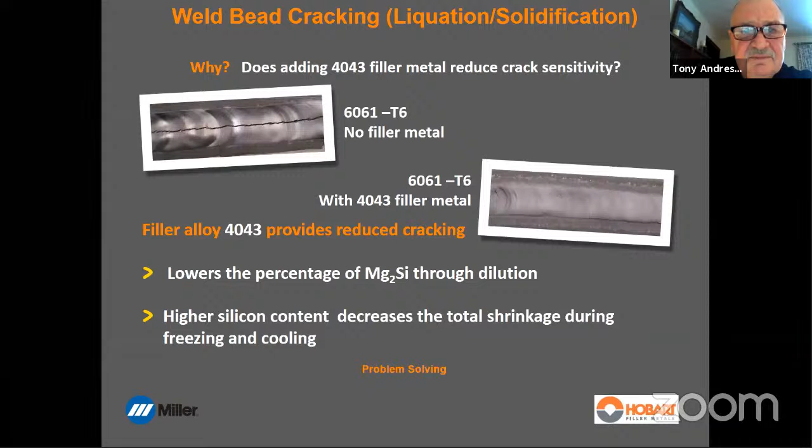So what does this mean in reality? People call me sometimes and say, hey, I'm welding 6061 groove weld, and I'm welding it with 5356, and it keeps cracking. I said, well, what joint preparation? Well, I'm using a square edge joint prep. I said, well, put a V prep on there and try it and see what happens.

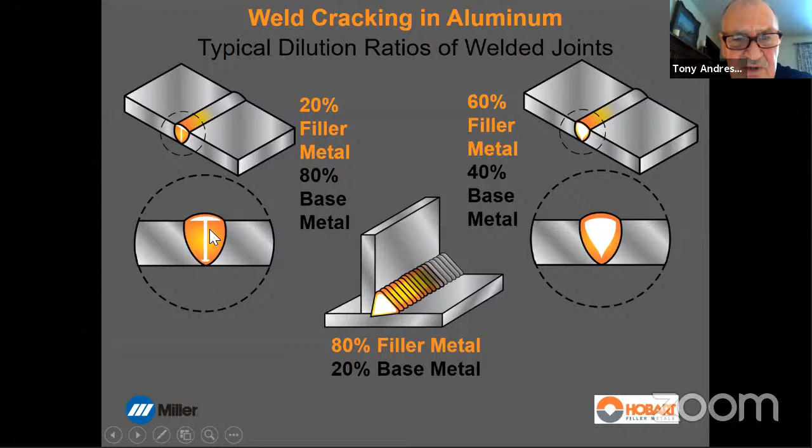This is what it's all about. If we have a square edge prep, we're looking at about 20% filler metal and 80% base material. That weld is going to be a composition of 20% filler, 80% base. If we put a V prep on here, we change this ratio. We now have 60% filler, 40% base, which changes the chemistry. The chemistry of these welds is different, as you can see.

6061 base material has 1% magnesium. 5356 filler material has 5% magnesium. So if we take 20% of the filler metal, which is 5% mag, and 80% of the base material, which is 1% mag, we do the calculation, it comes out at 1.8% magnesium in that weld. So you've got aluminum here. This molten weld is made up of aluminum with 1.8% magnesium, or thereabouts, very close.

Now we prep, we put this V prep, we now change this to 60% filler, so 60% of 5% mag and 40% of 1% mag. We end up with 3.4% magnesium in this weld. So this weld has 1.8% magnesium in aluminum. This one has 3.4% magnesium in aluminum. Which one's going to be most crack sensitive? 1.8, 3.4, 1.8, 3.4.

1.8 is almost at the peak crack sensitivity. 3.4 drops the crack sensitivity all the way down here. So the probability of cracking when you use that V prep is reduced substantially. So on occasion, the guy will call me back and thank me, but most times they don't, I don't hear from them. But I can guarantee that's going to resolve your problem.

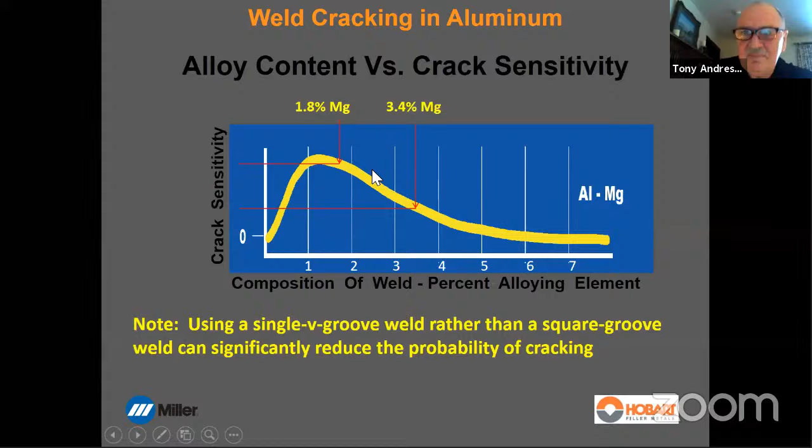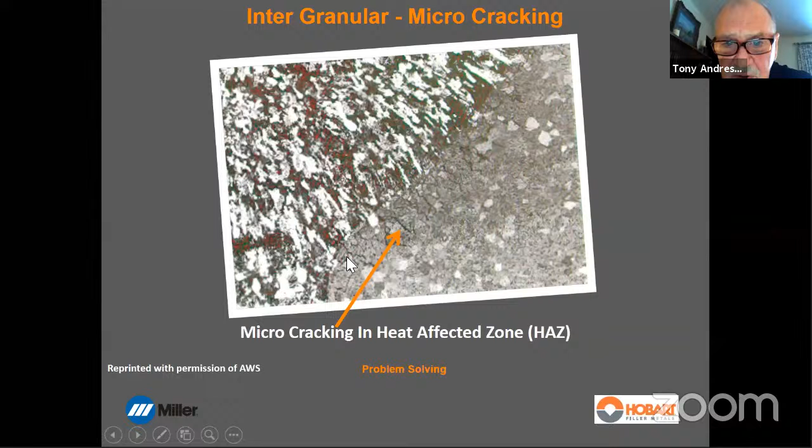All right, some other cracking, under bead cracking. On the heat treatable alloys, if we overheat them, particularly in multi-pass welds, we can cause this intergranular cracking around, beyond the fusion line. Not uncommon. So we've got to watch our heat input.

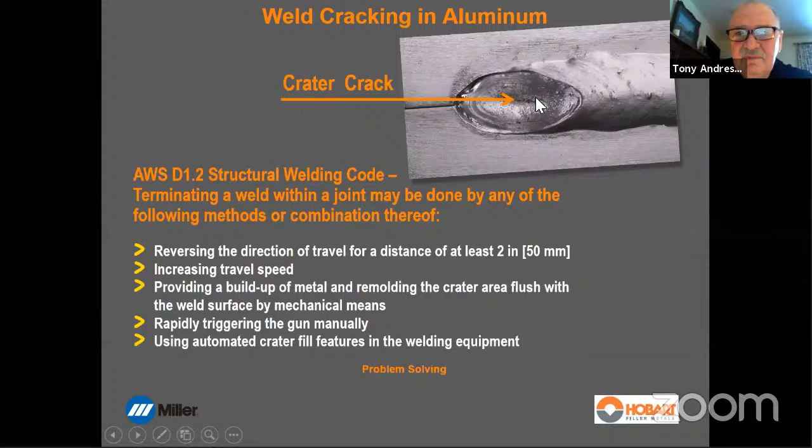This is an odd one that a lot of people have never seen. If you are plasma cutting any of the 6000 series or any of the heat treatable alloys for that matter, the codes require that you remove 1/8 of an inch of that prep before you incorporate it in the weld, because you're going to get these micro cracks across the surface of the weld.

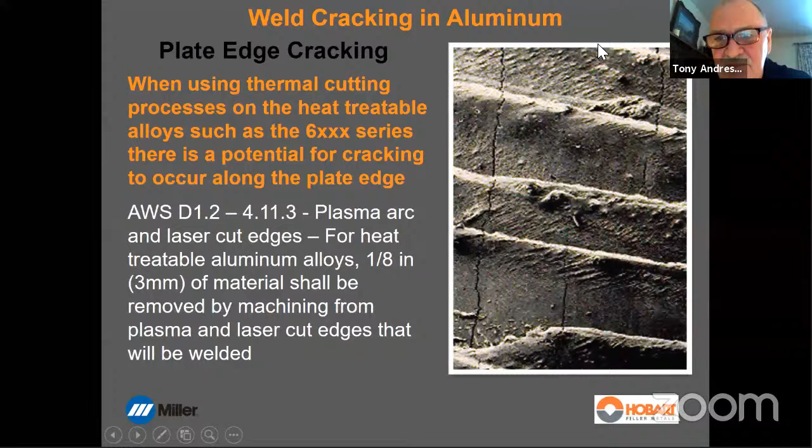Nearly finished, guys.

So how do we prevent hot cracking? Do everything I just told you: avoid weld profiles that are excessively convex, and so on. Use the filler alloy selection chart and check the crack sensitivity.

Right, got to go through this quickly. I hope everybody hasn't left already. Couple of books that are available out there. This is the one I told you about that has the crack sensitivity curves - I thought they were so important I put them on the front cover of the book. This is Welding Aluminum: Theory and Practice, available through the Aluminum Association. If anybody asks me which single book to get about welding aluminum, I tell them this one.

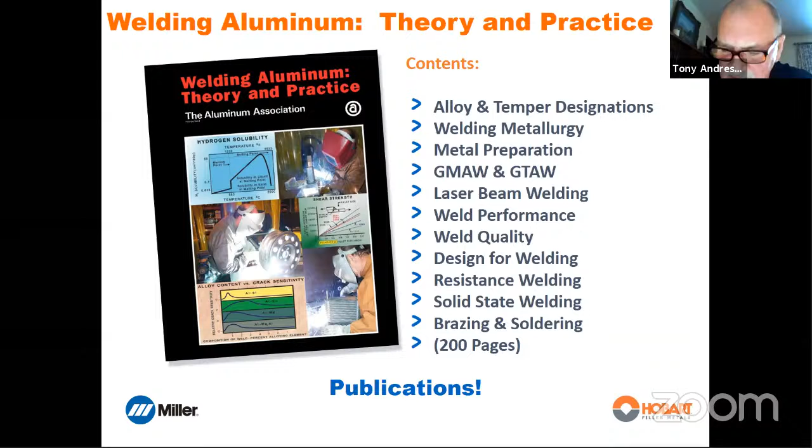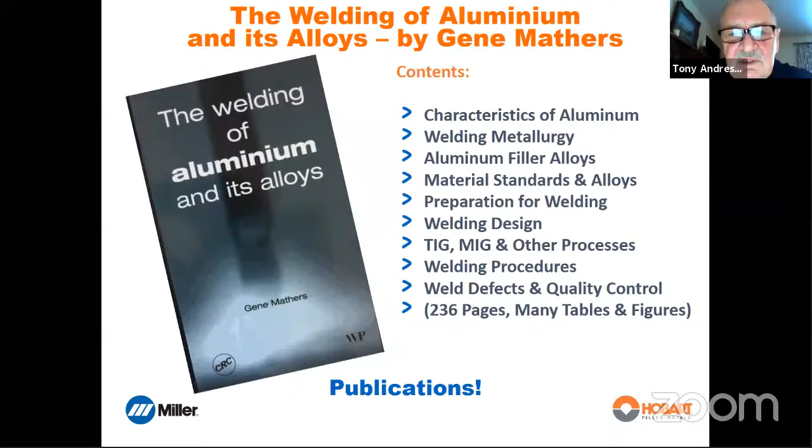I'm sorry I went way over, and I hope everybody just left. Is anybody at there at all? I think Tony, you've still got a good fair 175 people on board. We had about 190 most of the talk, and I think just a few would have had to push off at 7 o'clock in the evening here.

Wonderful presentation, Tony. I think you explained the chemistry fairly and made all of us understand the basics, and you simplified it so well. It makes a hell of a difference.